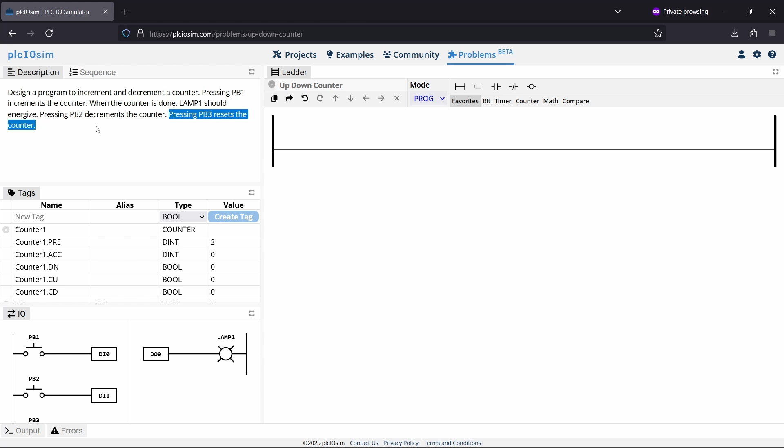Alright, so this should be fairly straightforward. We'll start with PB1 to increment the counter. So we'll use the count up function, tie it to counter 1. And then we'll use PB2 to decrement the counter, which is the count down command. And we'll also tie that one to counter 1. So let's just run and make sure that's working.

So you can see the ACC is going up and the ACC is going down. So that's working. What else does it want? It wants when the counter is done, lamp 1 should be on. Okay, so the counter is done when ACC is equal to or greater than PRE, which is 2, and then the lamp will turn on. And that's represented by this DN bit, counter 1 done.

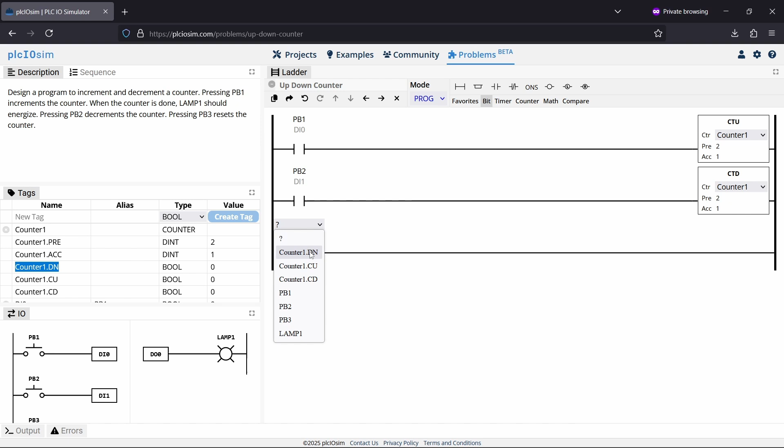So we'll make a new line, and we'll add the bit for counter1.DN. We'll add our light bulb. Go into run, and you can see ACC is above 2 and lamp 1 is on. Now let's try and go to a number smaller than that. So here's 1, 0, lamp 1 is off, so that's good.

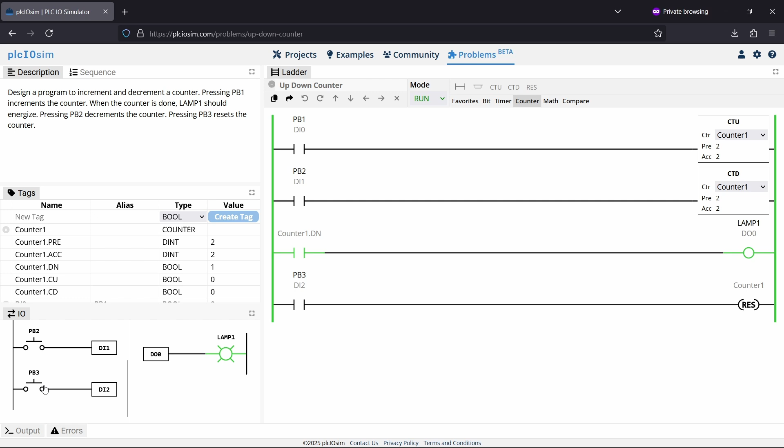Now finally it wants pressing PB3 to reset the counter, so that should be easy. We'll just get PB3, and then we'll use the built-in reset command for the counters and give it a run. So we'll count up a couple times, turn on the lamp, count down just for the heck of it, and click reset. Good, ACC to 0. Just like that, fellas.

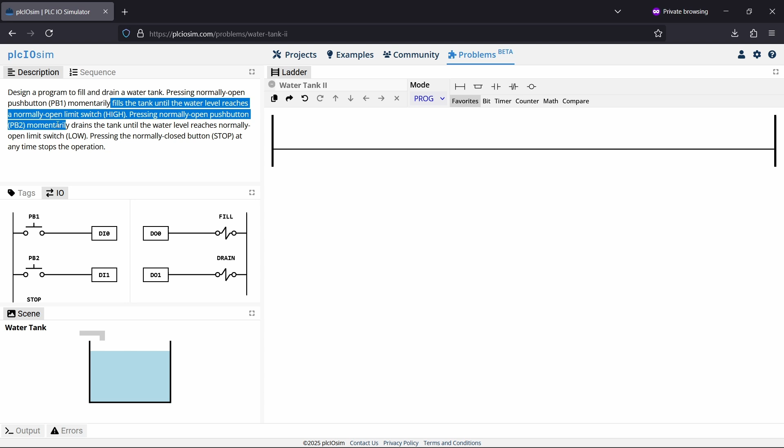I think it's time we try number 13, water tank 2, difficulty medium. Okay, design a program to fill and drain a water tank. Pressing normally open push button 1 momentarily fills the tank until the level reaches a normally open limit switch, high. Pressing normally open push button 2 momentarily drains the tank until the water level reaches normally open limit switch, low. Pressing the normally closed stop button at any time stops the operation.

Okay, this should be fun. It's similar to the one we did in the previous video, but this time we're adding the stop button, I suppose. Okay, so it looks like we'll have to make some latching circuits for the filling and draining processes, so that when you press and release the push buttons, the operation continues. So if you remember how I did it before, we had our stop button in series with our 2 parallel contacts, and that was all feeding the output.

We'll call that drain because the tank is full right now. And actually, yeah, this should work. Now this was the holding contact, and this was your energizing contact. And this was your stop button. So that when you press and release your energizing contact, when this command starts, this contact closes, and the sequence will continue to operate even without your button. So let's just verify that that's working. Click, unclick. And good, you see the drain works.

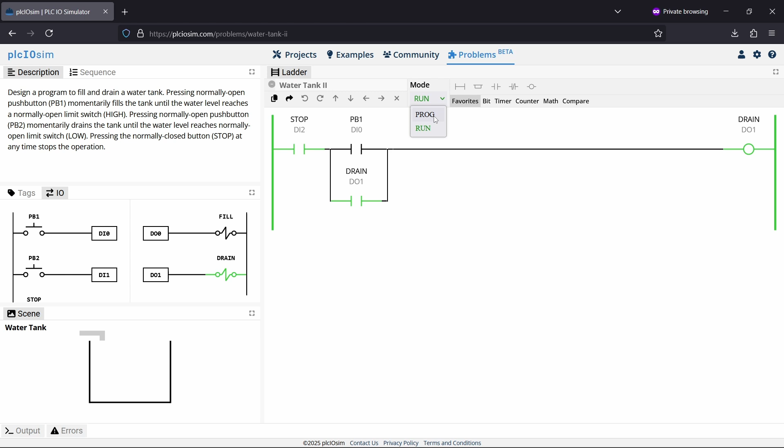However, I found out that there was actually another way to do this that's a lot easier. So let's take a look at that. Okay, so to make things easier, we can just use these built-in bits for latch and unlatch represented with an L and a U. And this will just make life a lot easier. So I'll show you what I mean. We'll just set it up like this. And we'll have to make a new line, PB2. This one will be unlatch

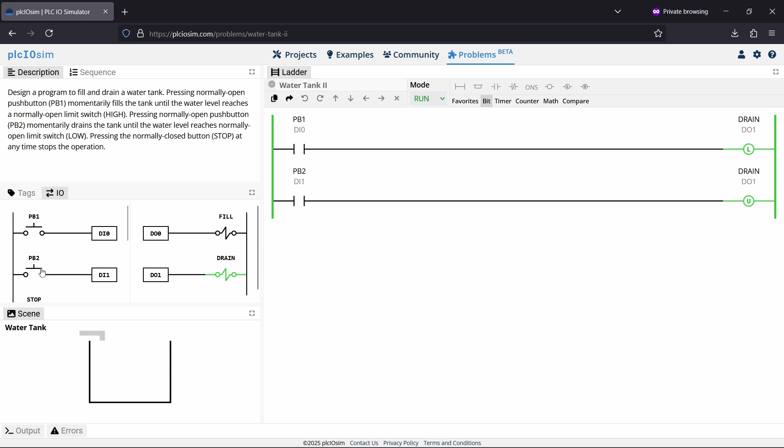for the drain. So the idea is, when I press PB1, as soon as this latch command gets the signal, it will enable and hold the drain command, even if I release PB1. So let's watch this. Oh, gotta go to run mode. You can see the drain command is staying on even though I let go of the button. The drain command is still on though, so to reset it we can just click PB2 and unlatch it. So that's just going to make life a lot easier for us, and that's how we'll be doing this from now on. No more holding contacts.

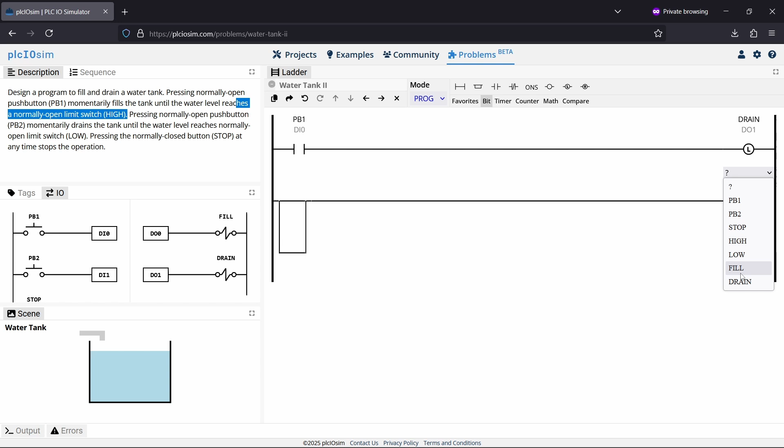Okay, with that out of the way, let's just get right to it. So in order to latch the draining process, we'll use push button number 1. Going to our latch bit for the drain. And now, in order to unlatch the draining bit, there's two things. We could either press the stop button, or we could use the normally open high limit switch. So a parallel set of contacts here will be able to unlatch the drain command. And I actually did this wrong. This will be fill. Push button number 1.

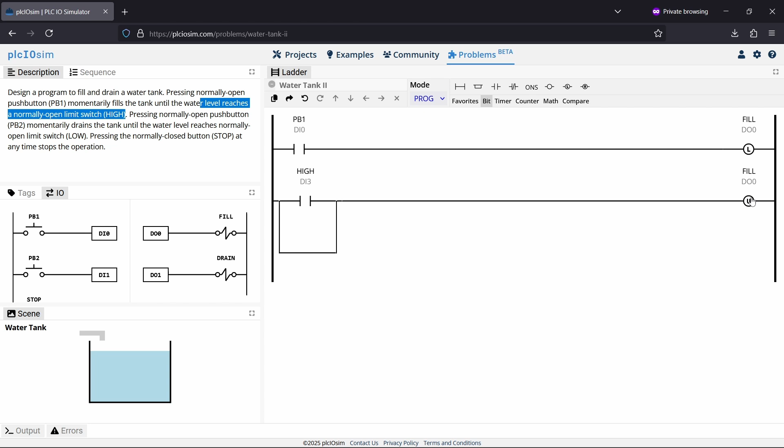So our first contact could be the high limit switch, because once the water reaches the top, this switch will close, and therefore this contact will close as well, and then we'll unlatch the filling process. But we also want to be able to press stop, but stop is normally closed, so we have to use the normally closed contact here. Because if stop is normally closed, it's normally energized, this contact that is. So this contact will be open until we press stop.

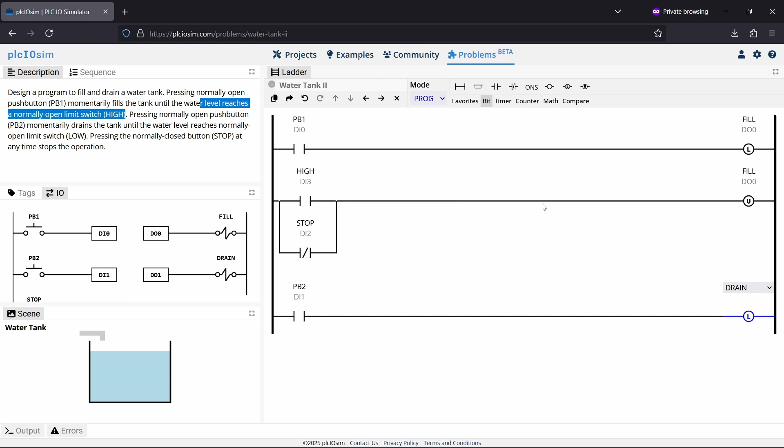And that should be how we unlatch the fill process. Now we'll just copy this for the drain. Do PB2 for drain. Do latch drain. We'll add our extra rung there with our parallel contacts. The stop button will be the same. That will unlatch the drain.

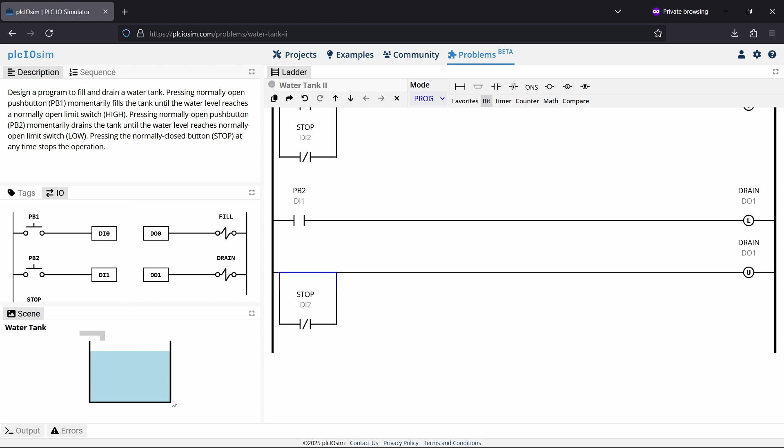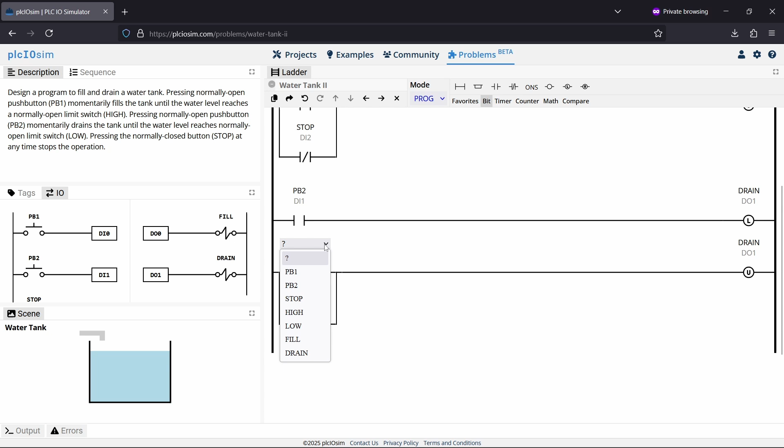However, the limit switch, the low level limit switch, is normally open, but that's when the water level is below it. So when the water level goes down, down, down, this switch will open, and that's when we want to unlatch the drain. So we'll actually, I believe, want to use a normally closed contact here as well. And we'll see if that works. Yeah, let's see.

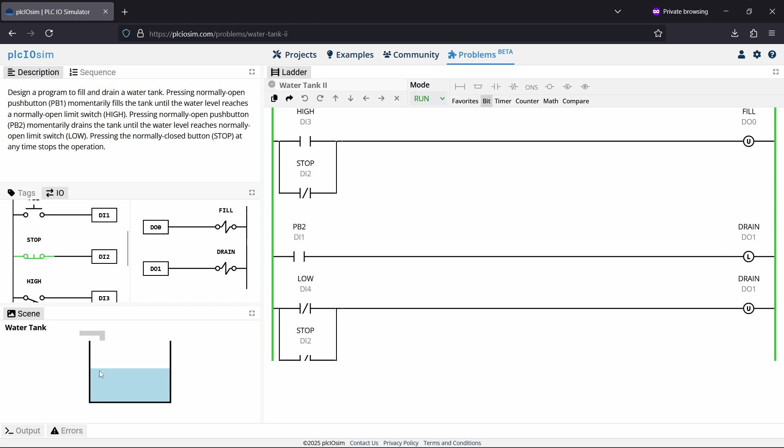So PB2 for drain, press release. You can see it unlatched once we hit the bottom, so that's good. That means our low level limit switch worked. PB1 for fill, press and release. See this contact switch here. Beautiful. Now let's see if we can use the stop button. Beautiful. Looks like we're all good here. Okay, let's just go on to the next one then.

Number 14, simple addition. This should be fun. Math is fun. Design a program to add two numbers. Pressing PB1 should add number A to number B and place the result in number C. Interesting. So we'll have to do some math here. Make an add box. And I guess push button 1 should go here to enable it.

And then we just do the two numbers we want to add. So we'll add number A and number B. Those are the two sources. The destination goes to number C. And I suppose the way that we view this is just in the table on the left here. So it looks like they've set values A and B to 2 and 3. So I believe if we run and click PB1, we should get 5 in number C.

Boom, just as I suspected. Now let's see if we can change these numbers. Cool. Alright, let's see what 7 plus 45 is. I have a gut feeling it's going to be somewhere around 52. Bang, displayed right here in number C. Would you look at that?

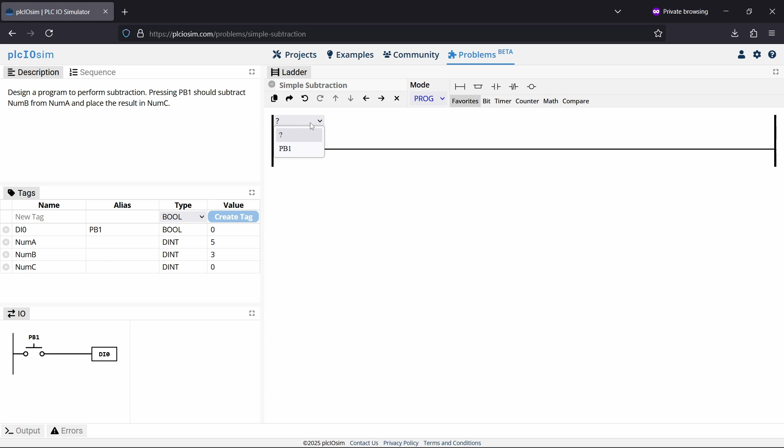And for our next challenge, we'll go to simple subtraction. And this should be lightning quick because I think it's the exact same as addition, but just the opposite. So we'll do push button 1 to subtract two numbers. We need to add the math box for subtraction. It wants us to subtract number B from number A. So I think it'll be number A minus number B if you do it this way. And then display it on number C.

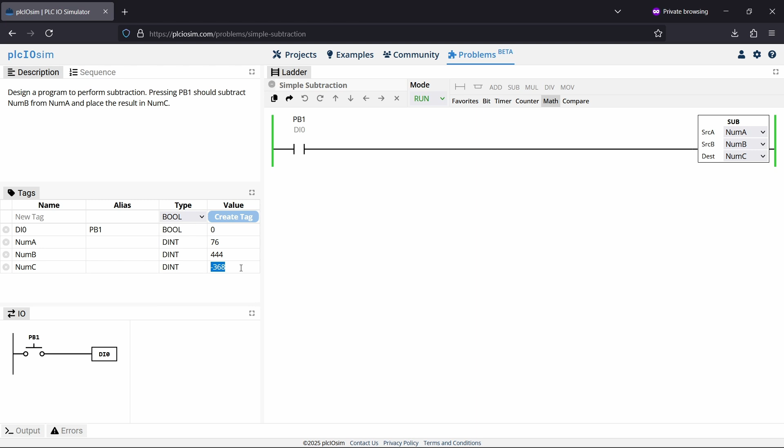So if I'm correct on how this works, then it will do 5 minus 3, and it will say 2 for number C. So sweet, we got it there. Let's play with some values. Let's do 76 minus 444. I don't even know what that is. Look at that, negative 368. Isn't that something? Okie dokie.

You can see that the next two is multiplication and division. We're just going to skip these because it's the exact same principle as the two we just did. You just get the box and put your numbers in it. So we wouldn't be learning too much there. So we're just going to try this one, which looks cool. Air compressor.

So, design a program to control an air compressor. Pressing start momentarily should energize the motor and begin filling the tank. When the tank pressure rises and activates the normally open high pressure switch, the motor should stop. Pressing stop should stop the motor at any time. Pressing vent should energize the valve solenoid and lower the pressure in the tank.

Okay, first we're going to need to build a latching circuit to turn on the motor using the start push button. So we'll use our latching command to turn on the motor. And we'll need two ways to turn off the motor. One will be the stop button, make that normally closed. The stop button is normally closed. And for the pressure switch, you can see that it closes as the pressure rises. It will push up and close that switch. So we can use a normally open contact. So that way, once the pressure is high enough, this will close. And either of these commands will cause the motor to unlatch.

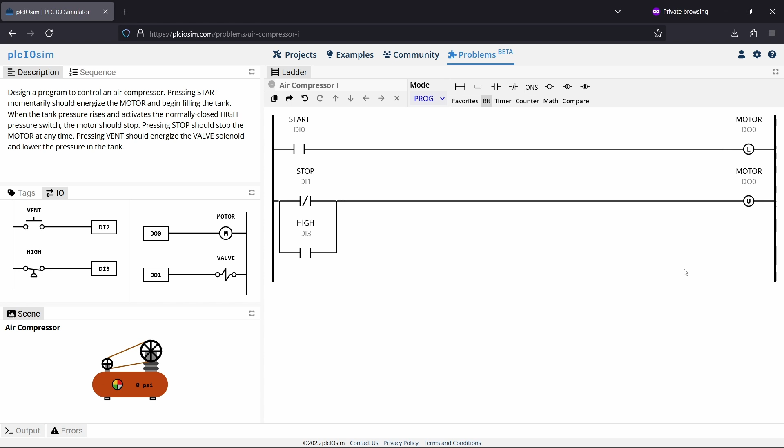Finally, we need to add our vent button, which is just a push button. Now when we're holding the vent button, the valve will activate and the pressure will decrease. So let's run and see if it works. Alright, so I'll do my latching start command. That seems to work. And we're going to see once the pressure gets to some sort of limit, this high level switch should close right here, and that should unlatch the motor immediately. So we'll just wait.

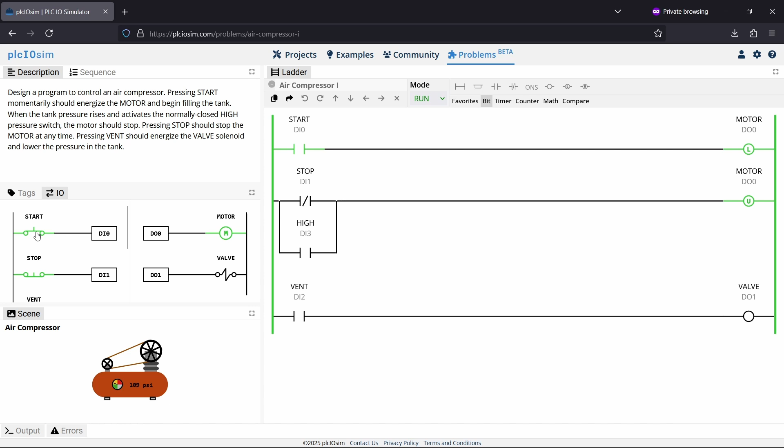There, 181 psi activates the high pressure limit switch. The only way to lower the pressure is to press this vent button, which will activate the valve. See, the pressure goes down. I'll vent it a bit more so that we can demonstrate the stop button. And now, yeah, we'll just double click the stop button here, and you can see the motor stops. So there you go, that's a good tank simulation for you.

Alright, that's going to do it for our time limit on this video, but in the next one we're going to do level 19, which is the hard difficulty one, so that should be fun. And who knows, maybe we can finish all of them in the next video.